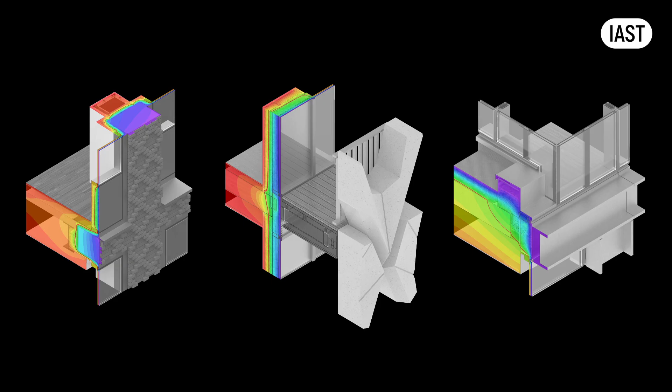And their job? Well, it's surprisingly complex. They're the ones making sure that massive glass walls don't turn your office into a greenhouse, that birds don't fly into it at 30 miles per hour, and that pigeons don't turn your building ledges into their personal penthouse suites. We're talking about a profession that includes building physicists who can tell you exactly how much heat will leak through the wall joint, material scientists who specialize in roof glazing that can survive hurricane-force winds, and even ornithologists who design strategies to keep pigeons out while providing cozy nesting spots for swifts and bees.

There are facade acousticians who ensure the city's noise doesn't turn your living room into a concert hall, and glass gurus who can engineer everything from bulletproof barriers to safety glass that breaks in just the right way. The industry even has its own supply chain consultants and commercial managers, because apparently even windows need business strategy these days.

Here's what might surprise you: this industry is worth over $363 billion globally and growing. That's comparable to the entire GDP of Finland or Vietnam. And you probably didn't even know it existed.

To understand how facade engineers evolved into this soon-to-be $500 billion industry, we need to take a journey through architectural history. This is the story of engineering problems where solving one challenge inevitably creates three new ones to tackle.

My name is Eugene Korch. I am a practicing facade engineer and I teach facade engineering at the Institute for Architectural Science and Technology. Today we are diving deep into the world of facade engineering: what are its roots, what do these engineers actually do, and why this profession is more critical than ever.

Let's start at the beginning. For most of human history, facades weren't engineered, they were just walls. And not just any walls, these were walls that literally held up the building. Think about it: walk into a medieval cathedral or an ancient Roman structure that is still standing today. Those massive stone walls weren't just keeping the weather out, they were the skeleton of the entire building. The floors rested on them and the roof was supported by them, and if you removed them, the whole structure would collapse faster than a house of cards.

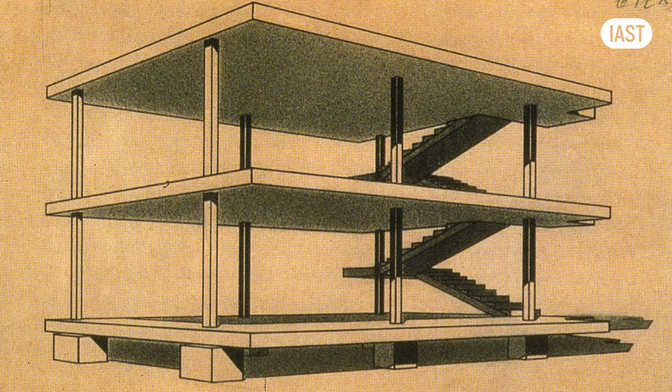This all changed in the early 20th century with the revolutionary material, reinforced concrete. Suddenly we had this grid of concrete columns and slabs that could do all the heavy lifting. The walls were liberated from their structural duties and could now hang from the building's framework, like a curtain. That's exactly why they started calling them curtain walls.

Now you might think this made things easier for the facade design. After all, if the wall no longer has to hold up the building, surely its job becomes simpler, right? Well, not quite. See, those old masonry walls were actually pretty good at their job, even if they were doing it in the most brute force way possible. Let me explain what I mean.

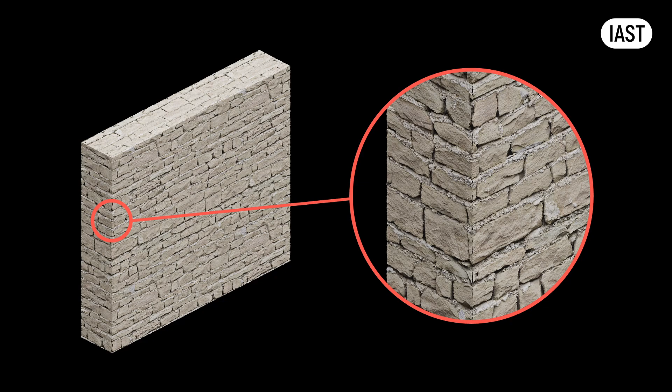Traditional mass walls, thick stone or brick construction, were essentially nature's Swiss Army knife. They handled everything through sheer mass and thickness. When it rained, they would absorb some water, but the wall was so thick that the moisture rarely penetrated all the way through. When it was sunny, the thermal mass would moderate temperature swings. When there was noise outside, the sheer mass of the stone kept most of it out. These walls were thick enough to park a car in, which made them excellent at dealing with sound, weather, and structural loads all at once.

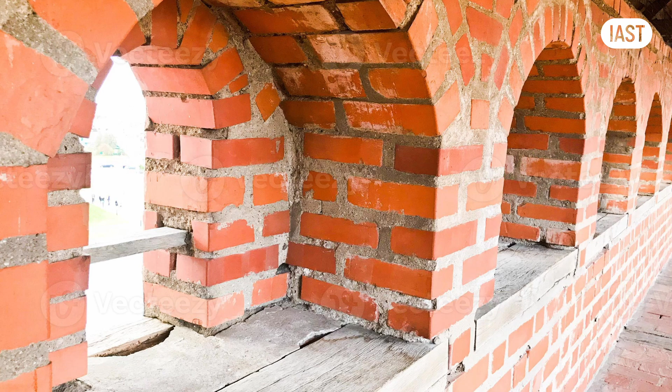And because they were so thick, window openings were relatively small, which meant overheating was rarely an issue. You actually wanted as much light as possible. The architect's main job was simply to keep direct rain off the walls with overhanging roofs and well-designed sills and ledges. That was pretty much it for facade engineering in the medieval era.

But once facades were freed from structural duty, structural engineers started backing away from the facade design. After all, the wall's only structural job now was to hold itself up and not fall off the building. That's when the first architectural technologists and facade specialists began appearing in the industry. They had a new challenge: how do you make a lightweight wall perform all the jobs that the meter-thick stone wall used to do?

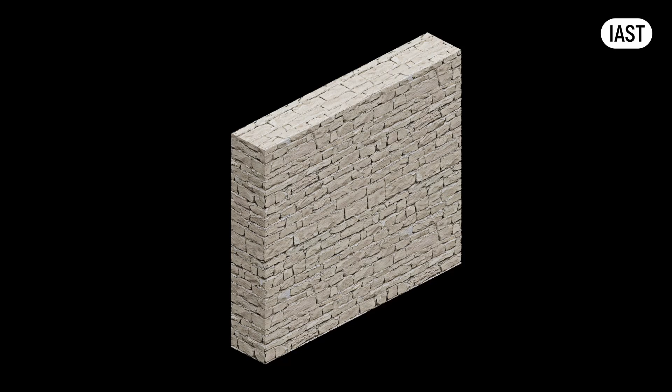The answer seemed obvious at first. If the old walls worked by being thick and porous, why not go the opposite direction? Make walls thin, light, and completely impermeable. Enter the perfect barrier concept.

Material science wasn't just advancing in concrete. The glass industry was revolutionizing too. Suddenly we could produce glass panels that stretched nearly from floor to ceiling. Combined with lightweight steel frames, we could create buildings that were essentially transparent boxes.

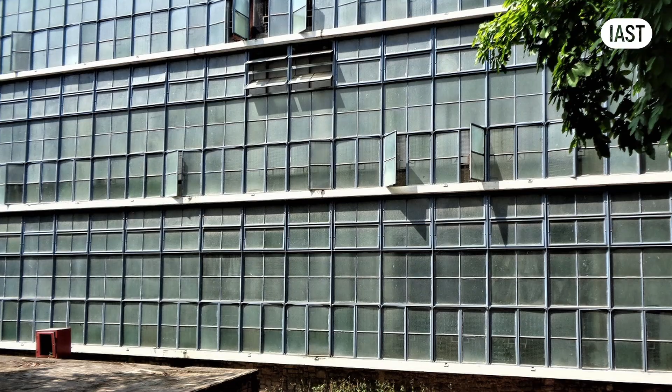Glass seemed like a perfect material for this new approach. Unlike masonry, it doesn't absorb water at all. It is completely non-porous. In theory, if you could seal it properly, you would have a wall that would never leak. The early curtain wall pioneers were optimistic.

They had these elegant grids of steel mullions and transoms holding massive glass panels, all sealed with glazing putty. It looked revolutionary, it felt modern, and it was going to change the architectural industry. There was just one small problem.

It didn't work. Those early glazing putties weren't elastic. They were rigid, and buildings move a lot. They expand and contract with temperature changes, they sway in the wind, and they settle over time. The putty cracked, the seals failed, and suddenly these perfect barriers were leaking like sieves.

And when they leaked badly, unlike those old stone walls that could dry out slowly, these sealed systems had nowhere for the water to go once it got in. The first generation of curtain walls became notorious for their leaks and water damage.

It took several decades before polymer science caught up with the architectural ambition. We needed to develop membranes, gaskets, and silicones that could move with the building while maintaining their seals. But even then, we had another problem.

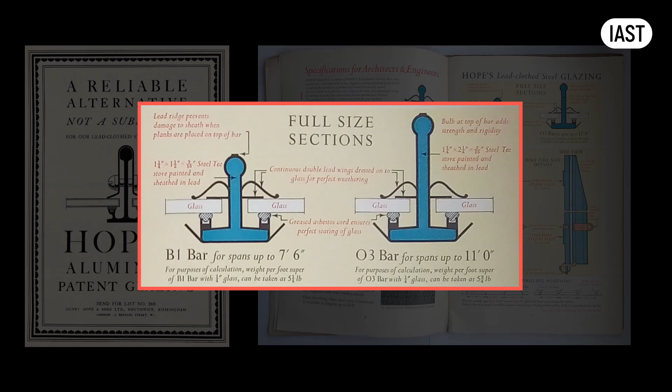These early all-glass facades were essentially single-pane windows covering entire buildings. They had no thermal mass, no acoustic performance, and they turned buildings into greenhouses in summer and freezers in winter. The perfect barrier was proving to be perfectly imperfect.

Faced with the persistent failure of sealed systems, facade engineers had a revelation. What if we stop trying to keep water out completely and instead focus on managing it when it inevitably gets in? This philosophical shift led to one of the most important concepts in modern facade engineering: the rainscreen.

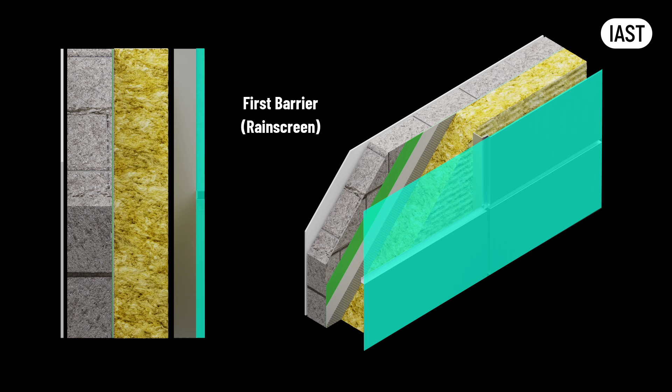The rainscreen principle is beautifully simple. Instead of one barrier trying to do everything, you create multiple layers, each with a specific job. The outer layer, the rainscreen, takes the brunt of the weather and does its best to keep water out. But behind it there is a cavity, and behind that there is a second barrier.

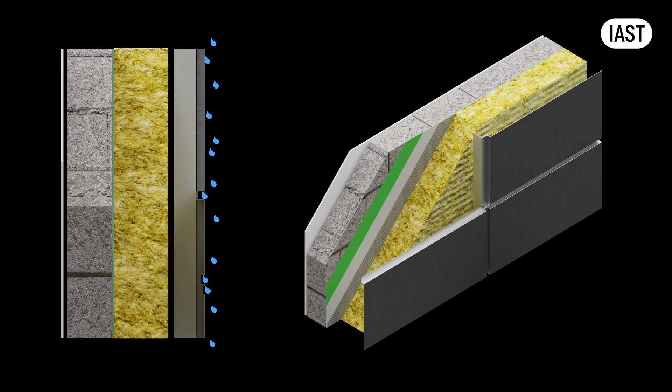Here's the clever part. When the water gets past the first layer, and it will, it hits the cavity. But the wind pressure that drove it through the first layer can't push across the cavity to the second layer. The water just drains down the cavity and exits at the bottom, while any moisture that remains evaporates and ventilates out. It's like having an umbrella and raincoat.

The umbrella, the rainscreen, handles most of the rain, but when some gets through, the raincoat, the inner barrier, keeps you dry. This concept wasn't entirely new.

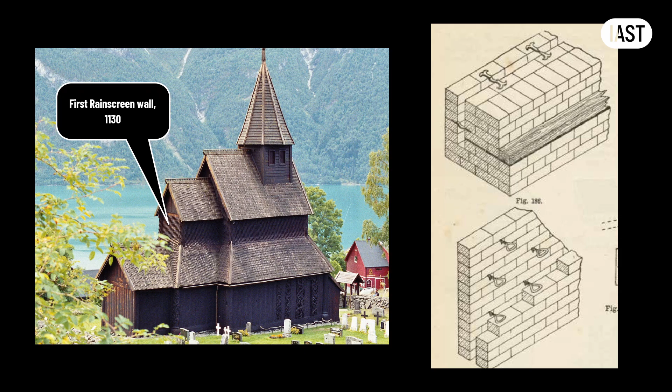Scandinavian timber builders had been using cavity walls for centuries, and British builders were using them in low-rise masonry construction in the early 20th century. But it took the spectacular failures of early curtain walls to make the industry embrace this water management approach.

The beauty of the rainscreen systems is that they are forgiving. They expect water to get in, they are designed to handle it, and they can dry out naturally. This was the fundamental shift from the perfect barrier mentality to the water management approach.

But just as facade engineers were getting comfortable with rainscreen systems, another challenge emerged that would force them to rethink everything once again.

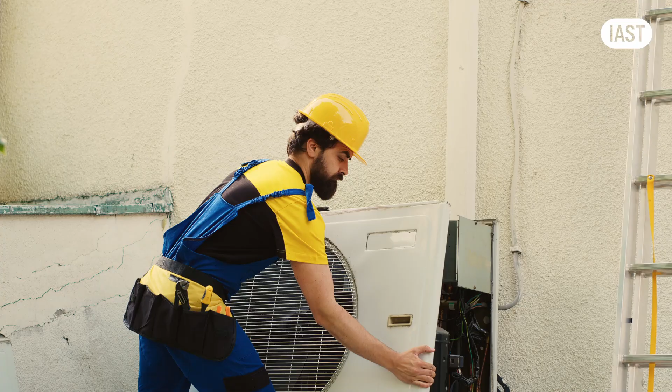The 1970s fuel crisis changed everything. Suddenly, heating and cooling costs weren't just operational expenses. They were a major economic factor. Buildings that had been designed without much thought to energy efficiency were bleeding money through their facades.

This introduced an entirely new parameter to facade design: thermal performance. Engineers now had to think about U values, thermal resistance, and heat transfer coefficients. For the first time in architectural history, keeping the heat in or out became a primary design consideration.

It might surprise you to learn that insulation is actually a relatively recent invention in construction. Throughout most of human history, we didn't really think about heat loss through the walls. Buildings were heated by fireplaces, which were expected to heat the air in the room, with the walls simply containing the warm air.

The concept of thermal resistance had been described by French physicists in the mid-19th century, but it took the stock market crash of 1929 and the subsequent Great Depression, and the energy crisis of the 70s, to really drive home the importance of energy efficiency.

Even then, insulation was mostly seen as a retrofitting solution. You'd blow insulation into existing wall cavities and add it to voids in between the stud walls. The transformation was remarkable. In North America, adding insulation was reported to reduce fuel bills by up to 30%

and make homes up to 7 degrees cooler on the hottest summer days. But here's what really changed: our expectations of comfort. Today, we expect to wear the same clothes at home all year round. We set the thermostat to 21 degrees and expect it to stay there, regardless of whether it's snowing or blazing hot outside. This concept of constant room temperature would have been completely alien to anyone living just a century ago. They wore warm clothes in winter and light clothes in summer, and they adapted to seasonal temperature changes.

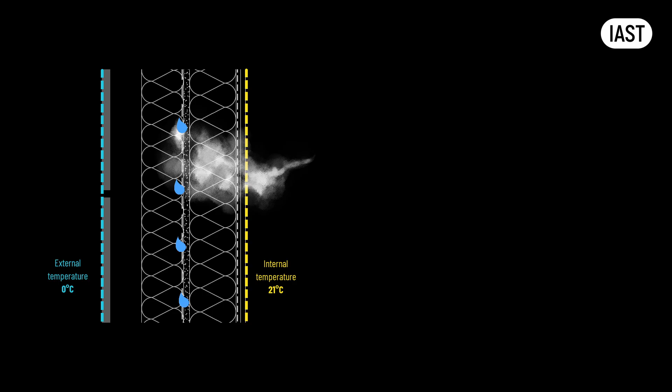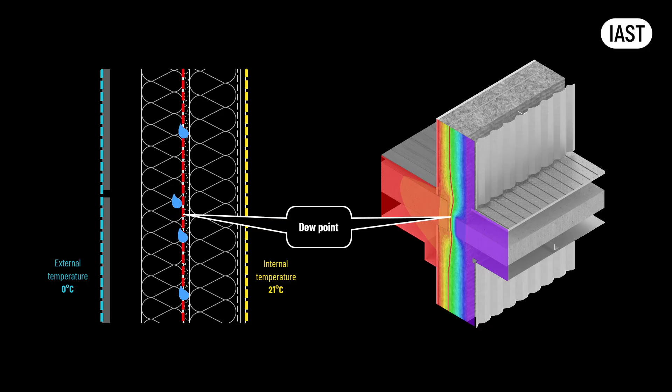The issue was the water vapor. Water doesn't just travel through the building materials as liquid. It can move through them as vapor, and when that vapor hits a cold surface, it condenses back into liquid water. With insulation filling the wall cavities, the dew point, the temperature at which vapor becomes liquid, suddenly coincided with the sheathing boards inside the wall. This meant that moisture from inside the building was condensing within the wall's assembly, where it couldn't escape.

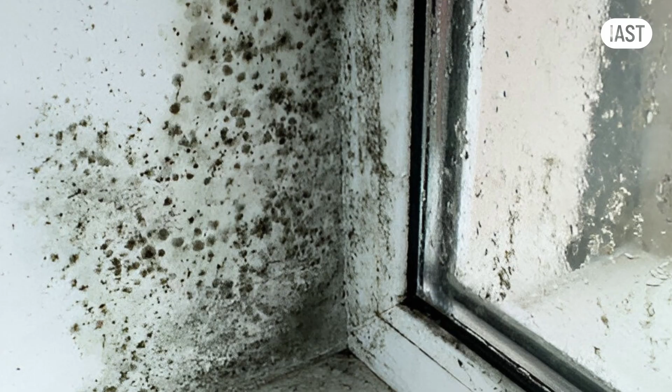The result? Mold growth and structural corrosion. Buildings that looked fine from the outside were literally rotting from the inside. This crisis gave birth to a new subspecialty, building physics. Building physicists analyze the permeability of different materials, their thermal resistance, and how they interact when combined in wall assemblies. They consider buildings' use, local climate, and seasonal variations in designing wall systems that can handle both thermal and moisture performance.

More recently, Joseph Lstiburek popularized the concept of the perfect wall, though the concept had been in use for decades before he gave it a name. The perfect wall concept is elegantly simple. Put all your control layers, air barrier, water barrier, and thermal barrier, on the outside of the structural wall.

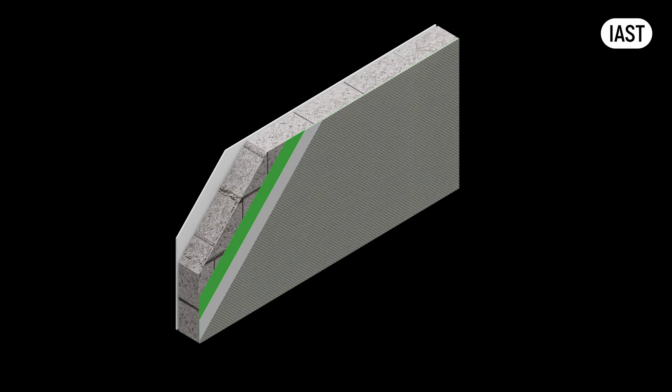Picture this. You start with a concrete or masonry wall, you cover it with a membrane that serves as both air and water barrier. Then you add a continuous layer of insulation. Beyond that, you create a drained and ventilated cavity. Finally, you add your cladding, brick veneer, metal panels, or aluminium composite material cladding.

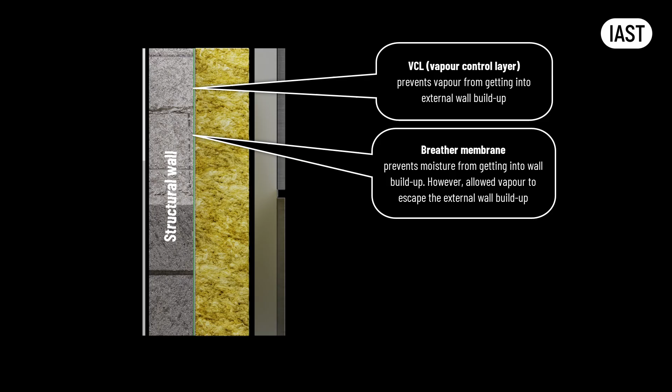This system works because the structural wall stays warm. It's on the inside of the insulation layer, which means you virtually never have to worry about interstitial condensation. The membrane keeps air and water out, the insulation controls heat transfer, and the cavity manages any moisture that does get in. It's cheap, effective, and works in almost any climate for almost any building type.

It seems like facade engineers had finally cracked the code. But remember when I said earlier about solving one problem, creating new ones. The perfect wall had a dark secret that wouldn't become apparent until much later.

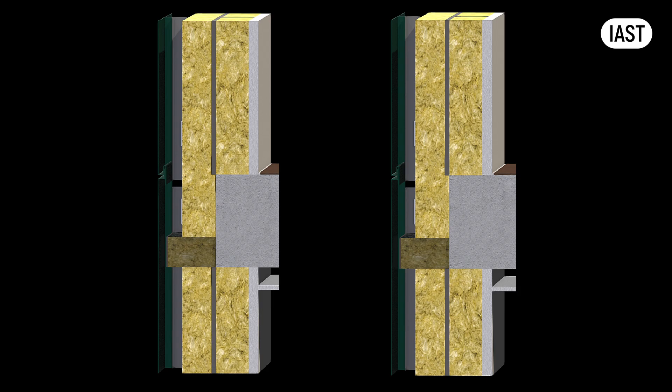The cavity that makes the perfect wall so effective at managing water also makes it dangerously effective at spreading fire and smoke. Air moves through these cavities, and unfortunately, so can flames. When you combine combustible insulation with combustible cladding and add a ventilated cavity, you've essentially created a chimney effect that can spread fire vertically through a building at terrifying speed.

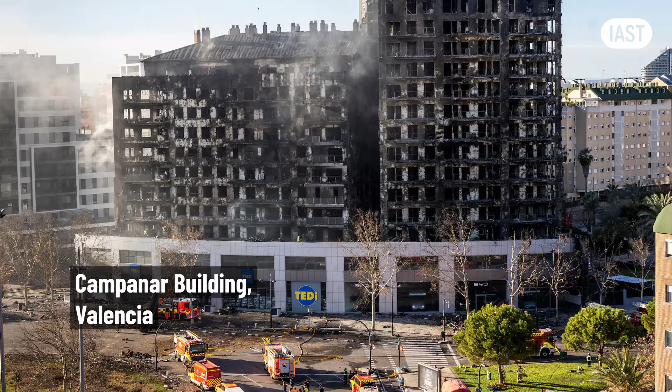The tragic fires at Grenfell Tower in London and the Campanar building in Valencia were devastating examples of what could happen. Both buildings featured the classic perfect wall assembly: insulation on the outside, ventilated cavity, and composite cladding. These disasters forced the industry to confront an uncomfortable truth. The wall systems that solved thermal and moisture problems so elegantly had created a potentially deadly fire risk.

This revelation created yet another sub-specialty in facade engineering, fire safety. Engineers now had to find ways to maintain the benefits of the cavity walls while preventing fire spread. For example, one of the solutions involved compartmentation, breaking up those continuous cavities with fire barriers.

These barriers use intumescent material that remains open during normal operation, allowing ventilation and drainage, but expands and seals the cavity when exposed to fire. Modern facade fire engineers also work with fire-rated glazing, automatic smoke vents, materials' reaction to fire properties, and spandrel area geometry, among other things. It is an entire field of engineering that barely existed 30 years ago.

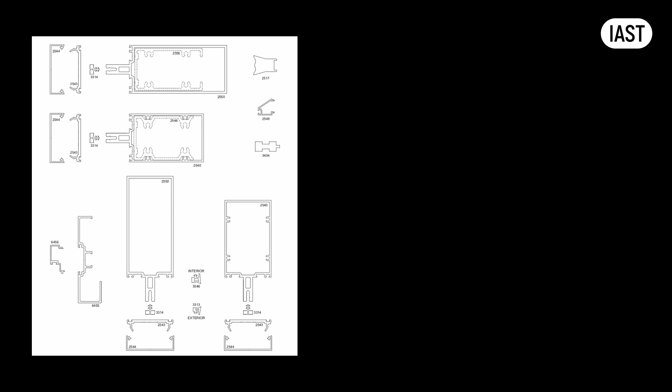While building engineers were wrestling with wall systems, the window and curtain wall industry was undergoing its own revolution. World War II had pushed aluminum and polymer technologies to entirely new levels. Gone were the days of simple steel sections and rigid glazing putty. Now engineers could extrude elaborate aluminum profiles and seal them with sophisticated rubber gaskets and elastic silicones.

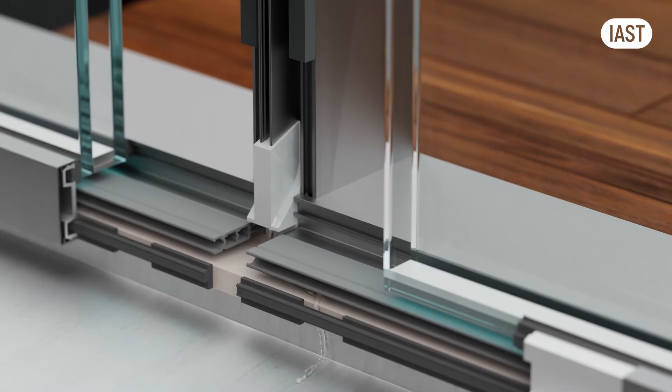This allowed the curtain wall industry to miniaturize the cavity wall concept. Modern windows and curtain wall profiles are essentially tiny rainscreen systems with elaborate internal geometries designed to manage water. These aren't just frames holding glass. They are complex labyrinths with multiple chambers, drainage channels, and thermal breaks. They feature two-stage sealed systems where the outer seal keeps most of the water out, but any water that does get in is captured and drained away through the internal cavity system.

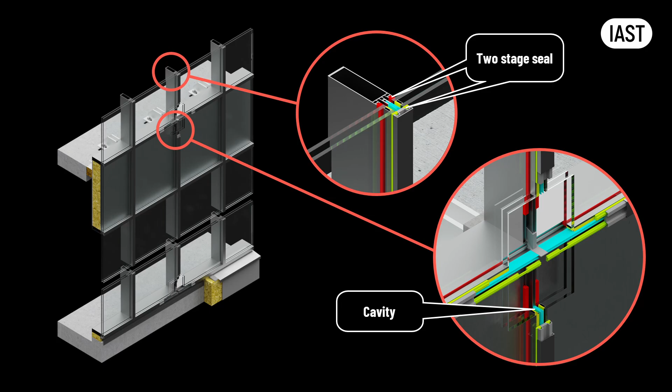The advancement in glazing technology was equally impressive. We can now fabricate glass panels the size of truck trailers, making floor-to-ceiling glazing routine rather than exceptional. But these advances created new problems.

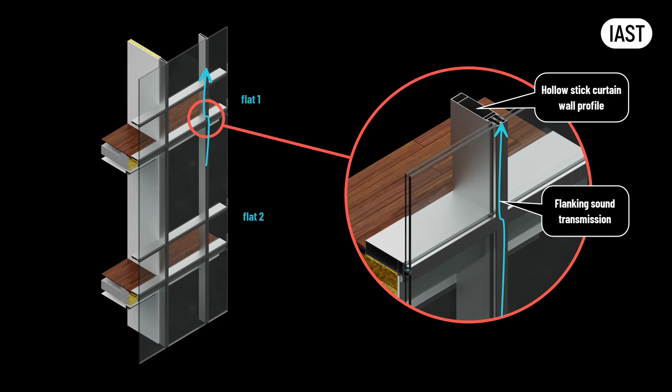All-glass facades might be watertight and airtight, but they are also very light, which means they have virtually no acoustic performance. Sound travels right through them, and worse, those hollow aluminum profiles create perfect sound transmission paths between floors and neighboring apartments.

Acoustic performance became another critical consideration in facade design. Engineers had to learn how to interrupt sound transmission paths by splitting mullions, filling them with acoustic inserts, or encapsulating them internally. For external noise control, the solution came from advances in glass technology.

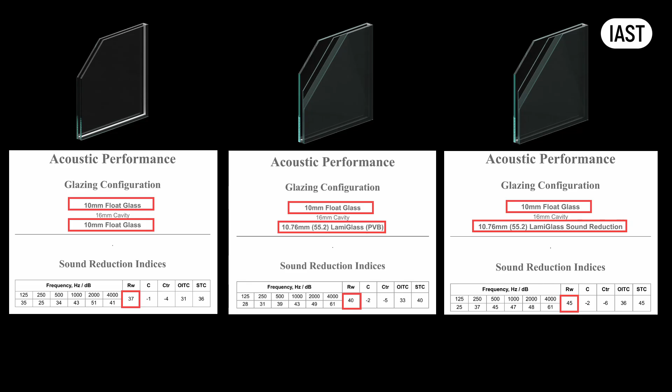Laminated glass, multiple glass layers bonded with acoustic film, provided mass and vibration dampening. Insulated glass units with asymmetrical glass thicknesses and inert gas-filled cavities further improved acoustic performance.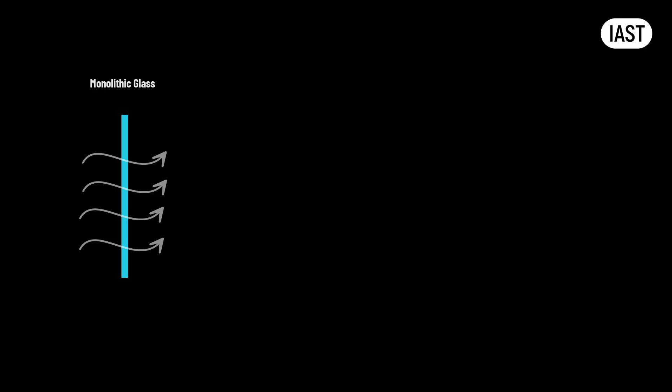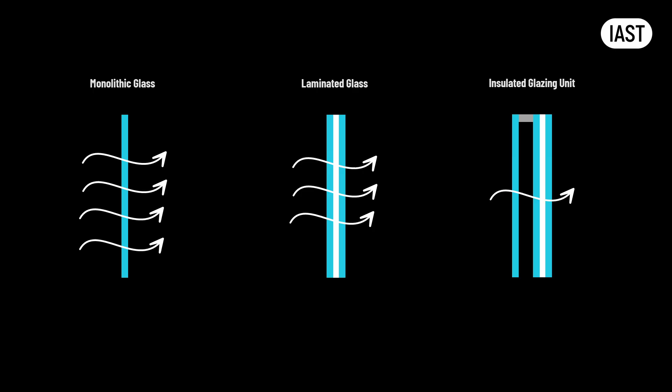Of course, these innovations weren't developed solely for acoustic reasons. Laminated glass was primarily a safety feature, ensuring that broken glass stays in place rather than falling. Insulated glass units were designed for thermal performance, with inert gas fills providing superior insulation.

Lamination and thermal treatment allow glass to become structural. Modern glazing can handle wind loads, support its own weight, and in some cases even support parts of the building structure. Glass went from being a simple infill material to being a structural component.

With unlimited glass sizes and improved performance, all-glass facades became ubiquitous, especially on skyscrapers. But this has created what might be the biggest challenge facade engineers have faced: solar heat gain. After all, the world's first all-glass buildings were greenhouses. Glass facades were great for growing tomatoes, but they are terrible for office buildings, especially in hot climates. The cost of cooling these glass boxes in desert cities is astronomical.

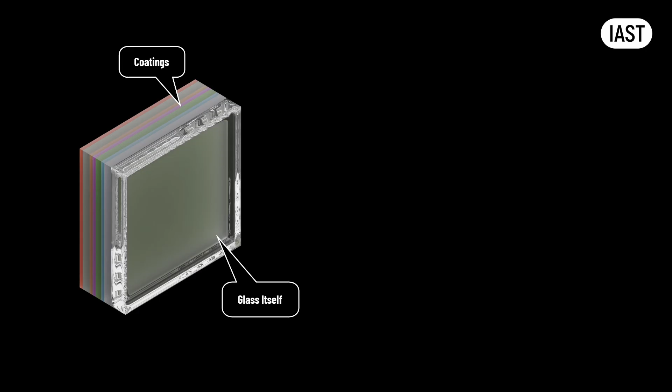The solution required advances in chemistry and material science. Modern glass coatings, created from a combination of precious metals and chemicals applied during various stages of glass manufacturing, can dramatically reduce solar heat gain while maintaining transparency. These coatings gave us those distinctive gold, blue, and green glass buildings from the 80s and 90s. Thankfully, coating technology has advanced to the point where high-performance glass can look completely clear to the human eye.

But even the best coatings aren't enough. The ultimate solution combines everything we've discussed: thermally broken aluminum profiles, high-performance insulated glass, and automated solar shading systems, all integrated into double-skin facades where the shading operates in the cavity between two glass systems. Modern facade engineering has essentially become aerospace engineering for buildings, designing systems that must operate flawlessly, high up in the sky, for decades, without the possibility of landing for maintenance.

Speaking of maintenance, this brings us to another specialized field: facade access engineering. Unlike an airplane that can return to a hangar for service, building facades must be cleaned and maintained in place, often hundreds of feet above the ground.

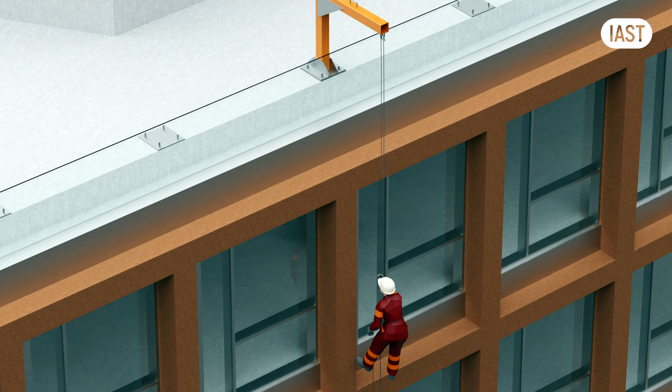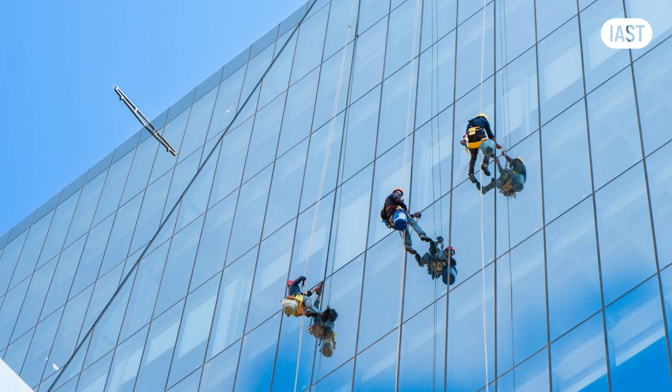Every facade design now includes a comprehensive maintenance strategy. This might involve building maintenance units suspended from the roof, provisions for rope access, or integration of motorized platforms. Some buildings even incorporate tracks or anchor points directly into the facade system. Facade access engineers design these systems to ensure that every component of the facade can be reached, cleaned, and replaced throughout the building design life, which is typically 60 years or more.

All glass facades created unexpected environmental problems, for example bird collisions. It's estimated that up to 1 billion birds die annually from colliding with buildings, only in the US. No, I have not misspoken - 1 billion. They either mistake reflective glass for sky and trees, or they simply can't see the transparent glass barriers.

This led to another subspecialty: facade engineers who specialize in bird-friendly design. They use fritted glass patterns, external solar shading screens, and other strategies that make glass visible to birds while maintaining human view. But facade engineers go beyond just preventing bird strikes.

They are now designing swift nesting boxes, bee bricks, and other features that create urban habitat for wildlife. At the same time, they are developing deterrent systems to keep pigeons and other pests from roosting in facade cavities. It is a delicate balance of urban ecology engineering that requires understanding both building physics and animal behavior.

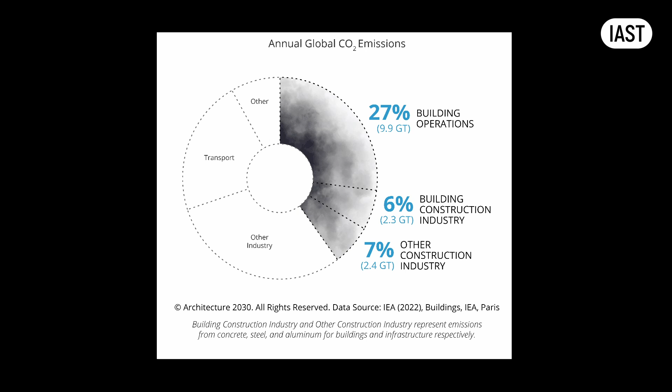The most recent and perhaps most urgent challenge facing facade engineers is sustainability and carbon footprint reduction. The construction industry is responsible for a significant portion of global carbon emissions, and building facades are a major contributor.

This has created another new subspecialty, sustainability-focused facade engineering. These engineers must balance all the performance requirements we have discussed while minimizing embodied carbon in materials, maximizing energy efficiency, and designing for disassembly and recycling at the end of life.

It's not just about choosing lower carbon material, it's about optimizing the entire system to minimize lifetime environmental impact while maintaining all the other performance requirements.

As you have probably figured out by now, we have made quite a few mistakes along the way. Millions of buildings from the 20th century are approaching the end of their design life - buildings with single pane glass, no insulation, and questionable water management.

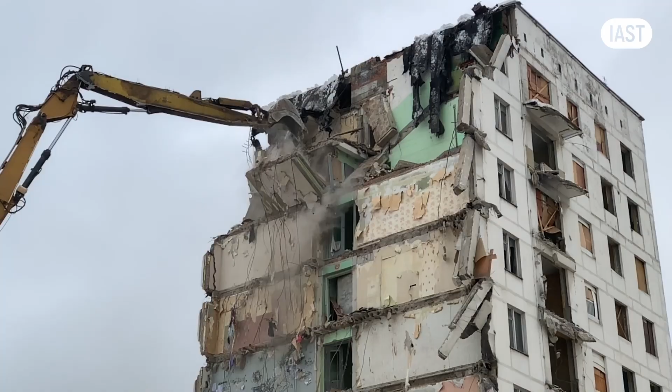Demolition isn't an option. The embodied carbon in existing structures represents decades of industrial production we cannot afford to waste. Plus, many of these buildings have cultural and architectural significance.

This creates two new subspecialties in facade engineering: retrofit facade engineering and forensic facade engineers. Retrofit engineers solve an impossible puzzle, bringing aging buildings to modern performance standards while often maintaining their original appearance.

You can't add external insulation to a listed building, so we have developed smart vapor permeable membranes for internal insulation that prevent condensation problems. Those energy hemorrhaging single glazed windows are dealt with using vacuum insulated glazing that fits existing frames.

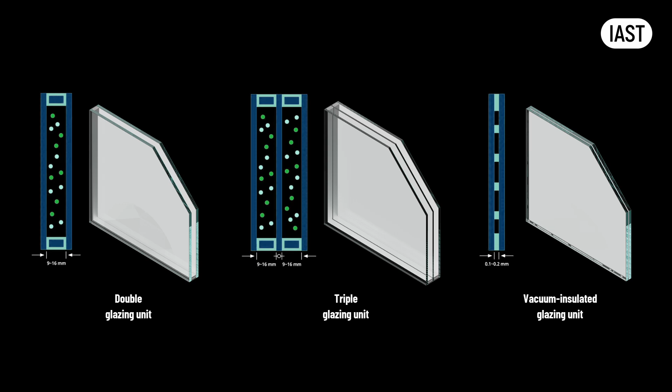Forensic facade engineers are the detectives of the industry. They investigate facade failures, analyze aging materials, and determine what's salvageable versus what needs replacement. They are often working with materials and systems no longer manufactured, essentially performing building archaeology.

And the irony is, retrofitting often requires more innovation than new construction. You are solving problems that weren't anticipated when the building was built, using technologies that didn't exist then, within constraints that would never be accepted today.

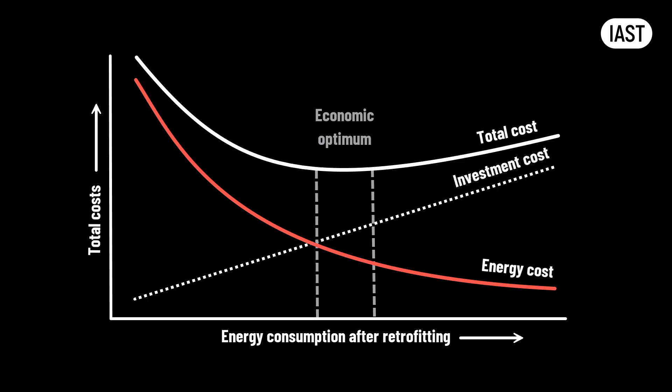But when it works, a retrofit can extend a building's design life by 50 years while reducing energy consumption by 80%. That's engineering impact worth celebrating.

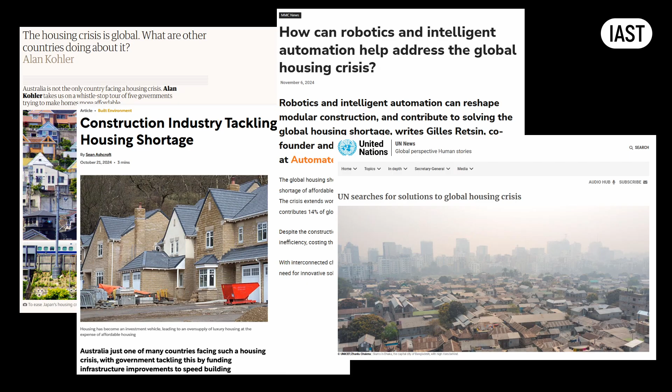Finally, we come to perhaps the biggest challenge of all: the global housing crisis. Nearly every country is facing housing shortages, which means we need to build faster and cheaper while solving all the technical problems we've discussed. This creates a fundamental tension in the facade industry.

The industry has become incredibly sophisticated, but that sophistication comes with complexity and cost. Engineers must now find ways to simplify systems without compromising performance. The most tragic part of this challenge is that most people don't even know the facade engineering industry exists.

This is a $363 billion global industry, comparable to the entire economy of Finland, growing at 8% annually towards $673 billion by 2032.

Yet there are relatively few people in the industry, and even fewer educational programs. Universities offering facade engineering qualifications globally can be counted on two hands. We are facing a massive skill shortage just as the challenges become more complex and urgent.